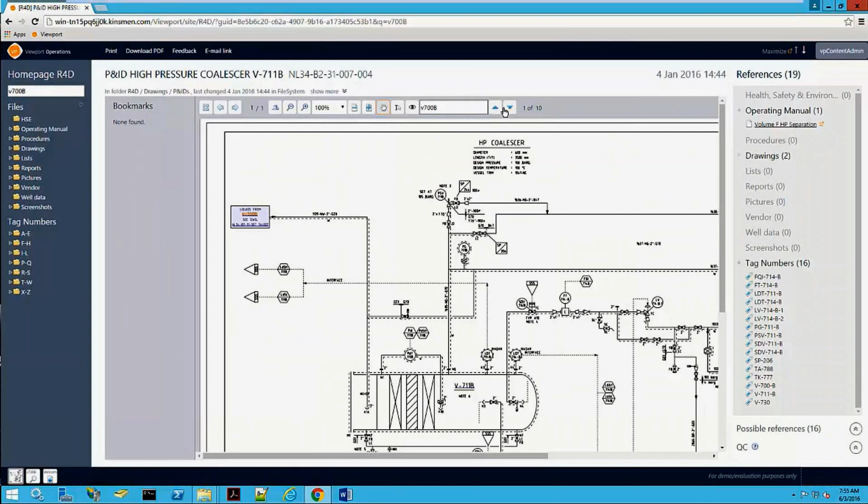Okay, so zooming into the drawing, you can see that there are 10 occurrences of this tag within this drawing. And as you can see, we're scrolling through all the occurrences within the drawing itself.

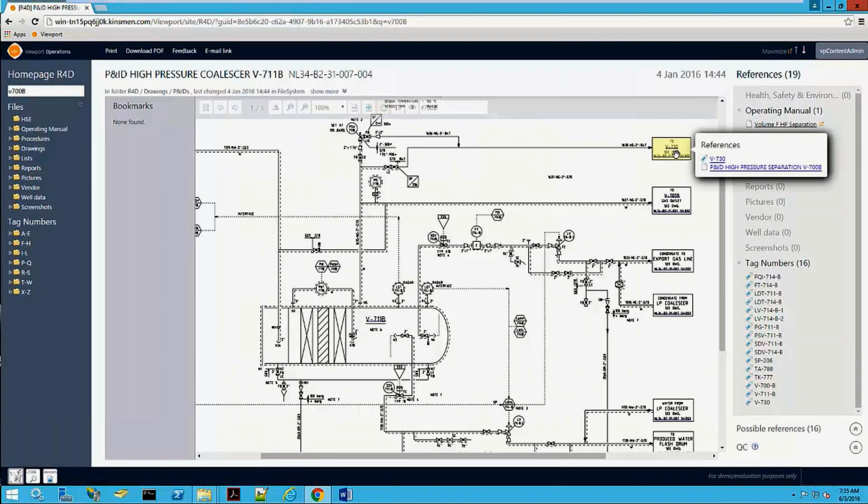You will also notice that there are other tags, hotspots, and selectable areas within this drawing. On selection of these hotspots, you will see the actual reference in more detail. This could be tag metadata that has come from an enterprise asset management system, such as SAP or Maximo, or even references to other drawings within this drawing, also allowing you to navigate to them from here. Again, a very nice feature.

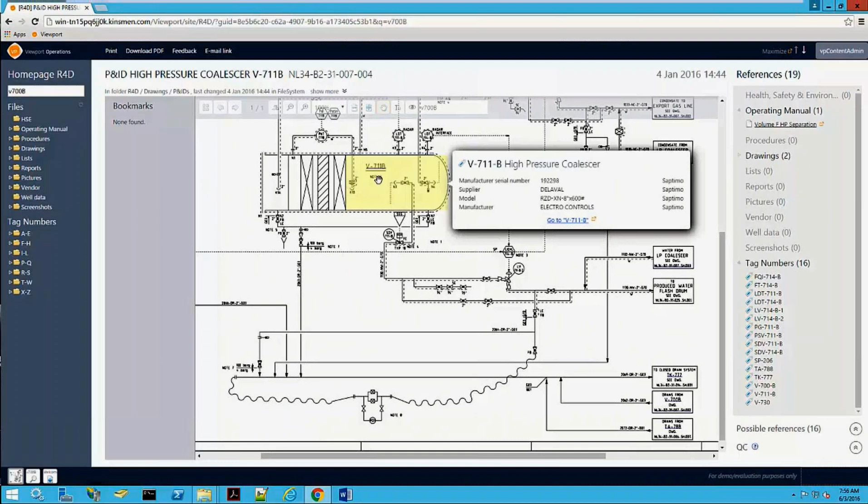We'll just wait for the tag selection to catch up. Okay, so you'll also notice on the right-hand side the references pane, detailing all reference information for that drawing, and again, these can be to other drawings and documents and other tags too. This provides a neater, more intuitive navigation across items in Viewport.

And as you can see, you can select tags from the right-hand side, and they are linked to the reference in the drawing itself.

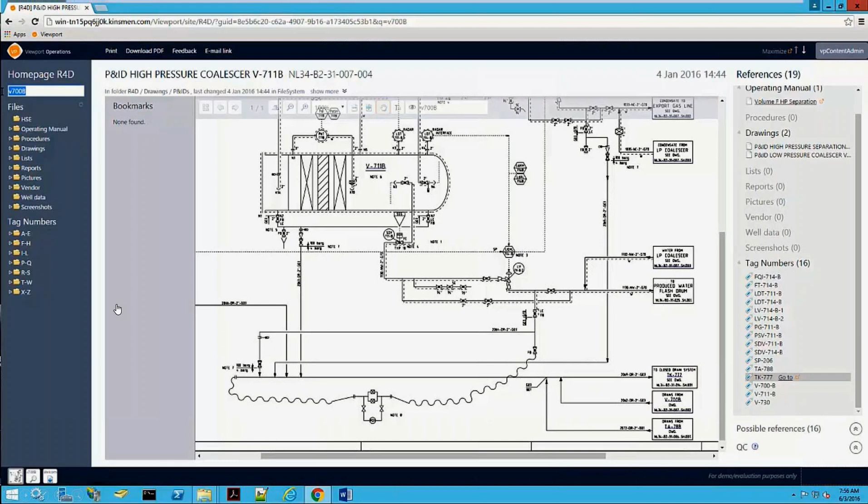As well as searching for tags, you can also search for specific text, again, to be found in the content or metadata. In this example, we are searching for the word operations. Viewport provides a more intelligent search here, which not only searches for the specific word or words, but also variations such as operating or operated in this example.

So let's select one of those manuals and have a look more closely. And as you can see, within this search, there's 73 occurrences or variations of the word operations in this document. So we have, starting off, we have operating and operating again, and operation.

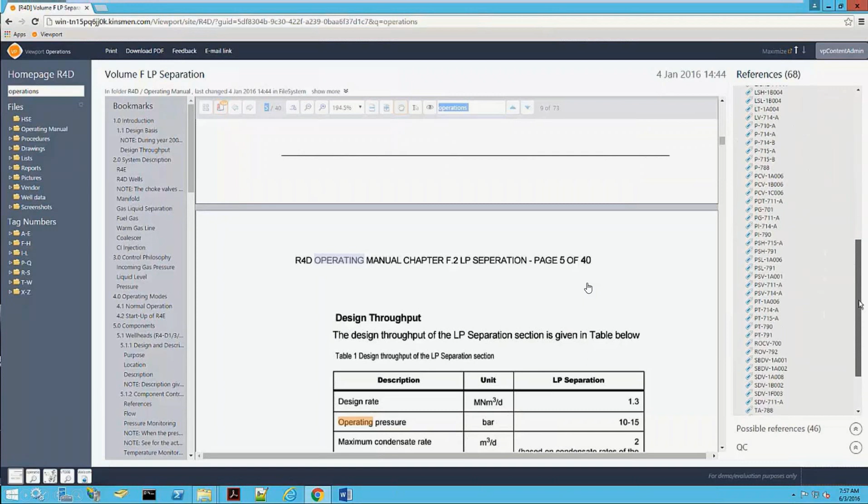On the right-hand side, you'll also notice again that now we've opened a different document. It itself has its own tag references, which you can then select and navigate to within the drawing.

Okay, so the second part of this portal demo is to demonstrate how drawings and documents can be QC checked within Viewport. Whilst being available for public consumption, drawings and documents can be QC checked in parallel, allowing any references to be validated if there are issues during the import.

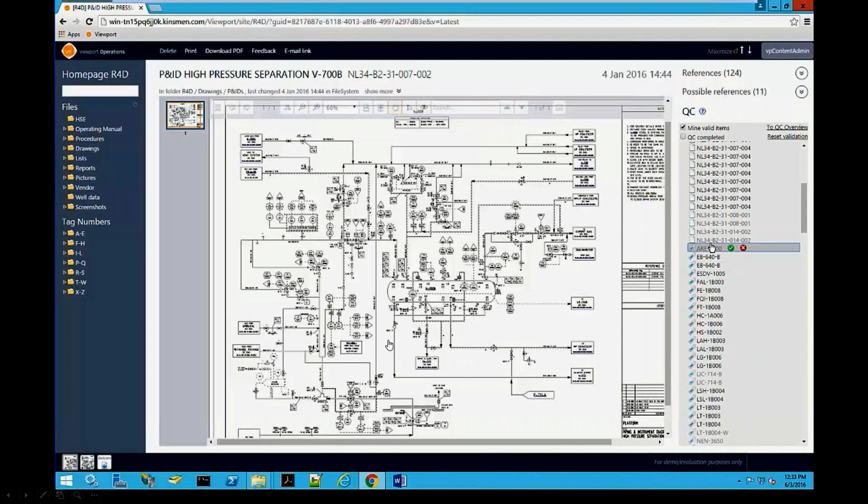As mentioned previously, you can find all the references for a particular item in the references pane, as well as the legitimate references, you'll find the possible references. This means that although these references were extracted from a drawing or document using OCR technology, the actual tag or drawing or document that it refers to doesn't actually exist. Another reason might be that the OCR has not extracted the data correctly due to rogue characters in the content, for example. So these will be highlighted in both the possible references and QC section.

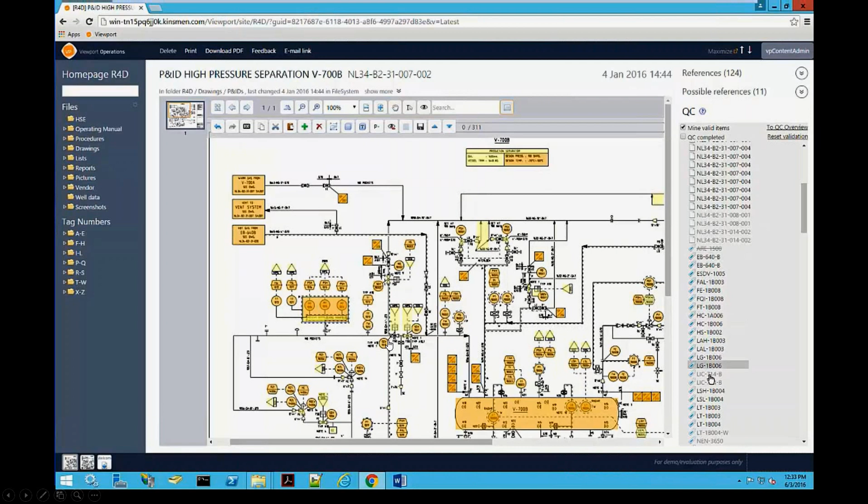The QC feature then allows someone to validate this information and correct it. The user can accept the tag references or even deem it invalid. This could also raise a flag to indicate that a specific tag has not come over from the enterprise asset management system for some reason. As part of the QC check, you can even update specific cells in the drawing, as you can see.